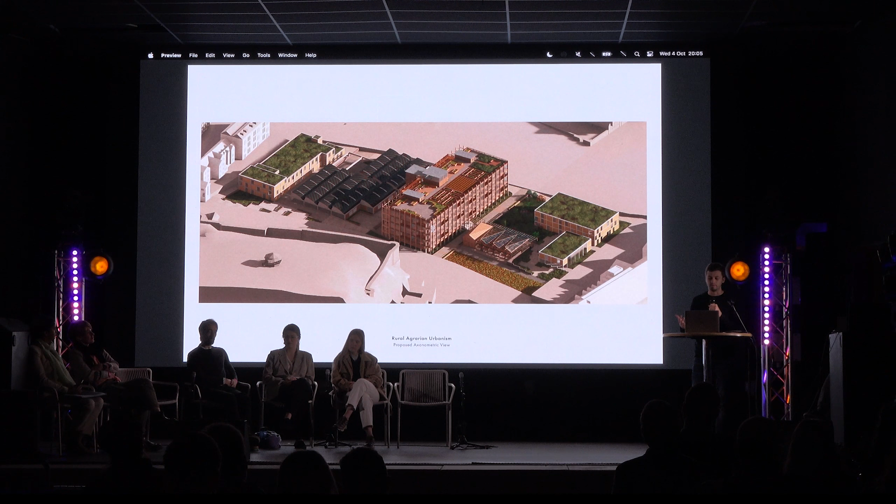Essentially it was the idea of bringing rural principles and the idea of cultivating land into the urban fabric, and using it as a catalyst for driving social engagement between the inhabitants of the housing block. Our entire brief was to create a co-housing community within Nottingham, trying to create a low-rise, high-density and near-zero demolition adaptive retrofit project within the urban fabric.

So our site was the People's College, which is at the foot of Nottingham Castle, so quite an interesting site. Essentially, creating a community which is embedded within the city with an emphasis on visual connections between clusters of residents and the wider general public, layering the physical and visual separation between the two realms.

Making prevalent use of urban growing to not only offer a focal point for engagement through a cohesion between food production and the observation and distribution to the general public. So that's trying to have the cultivation of land as a social engagement between the residents and also the wider general public to keep it embedded within the city itself.

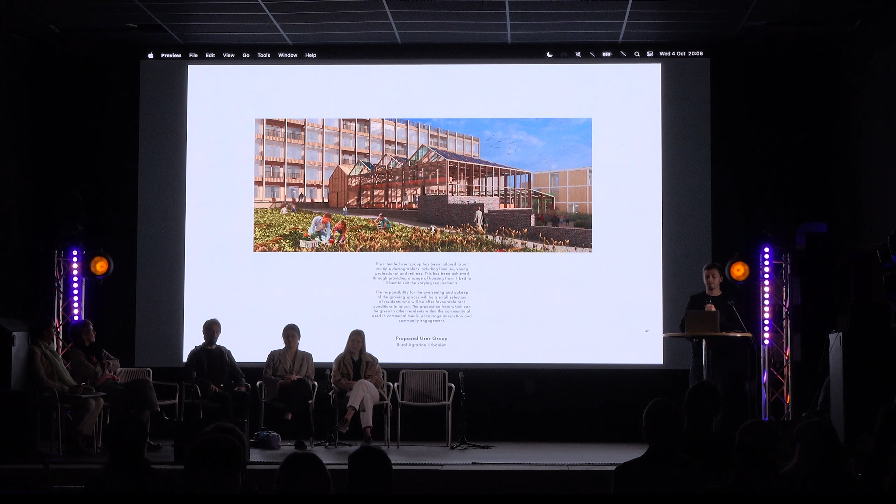So trying to incorporate more user groups. With the apartments that I proposed, I've tried to keep it between 1 and 3 beds to cater for varying needs from young professionals to families as well.

So like I said, this was the People's College at the foot of Nottingham Castle. Just to the southeast of the site is the new Broadmarsh development, which has been proposed at the moment. Trying to feed that into the scheme, creating some sort of public green route through the site or ground floor permeability to try and encourage the general public to engage with the site itself.

And then looking at the houses which border to the north and south, looking at the visual connection between these and the potential overshadowing. Similar to the sustainability things that you want to incorporate into the scheme, rainwater harvesting was one thing that I looked at. And then also looking at maintaining views - these were all the principles that I looked at the start before I started to get into the design process.

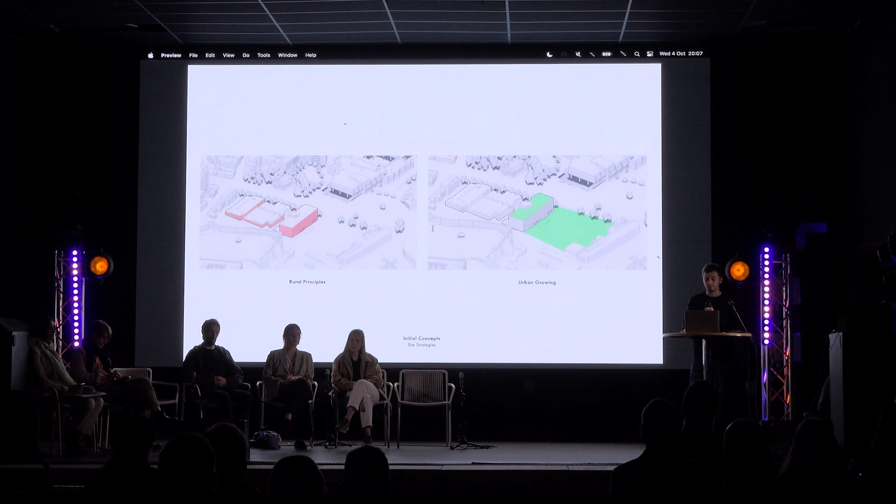Same as I said, rural principles and urban growing. These were just the initial set of principles which I kept as my main briefing when I looked through my scheme: autonomy and self-sufficiency on the site, alternative technologies, a focus on readily available materials, off-grid in regards to water, maximising the utilisation of the existing structure as much as possible, and also maximising sunlight and water access.

So my initial sustainability strategies were looking at retrofitting a double skin facade to the existing 5-storey block, trying to incorporate a passive stack through the centre of that, basically to drive the ventilation and energy through the scheme.

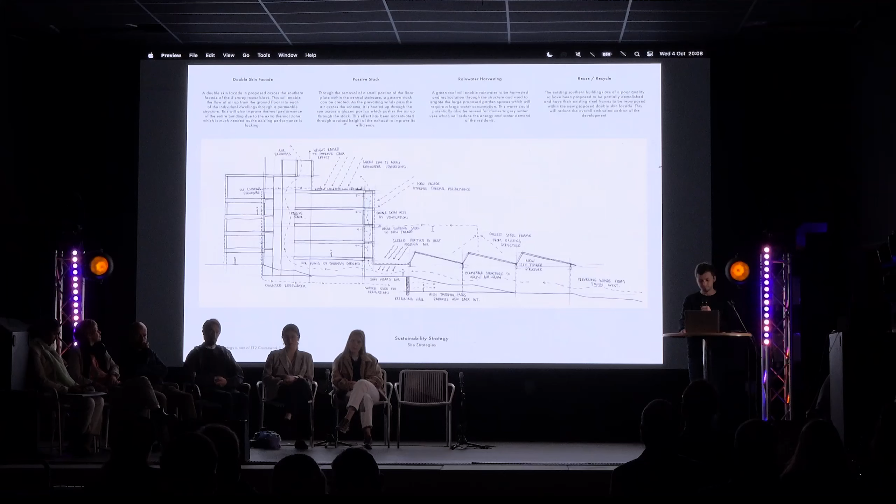Rainwater harvesting, as I said, and trying to reuse as much of the existing structure as possible. Looking at ventilation as well, so any of the apartments that I've incorporated, I've tried to incorporate cross ventilation to mitigate the energy input that's needed for that.

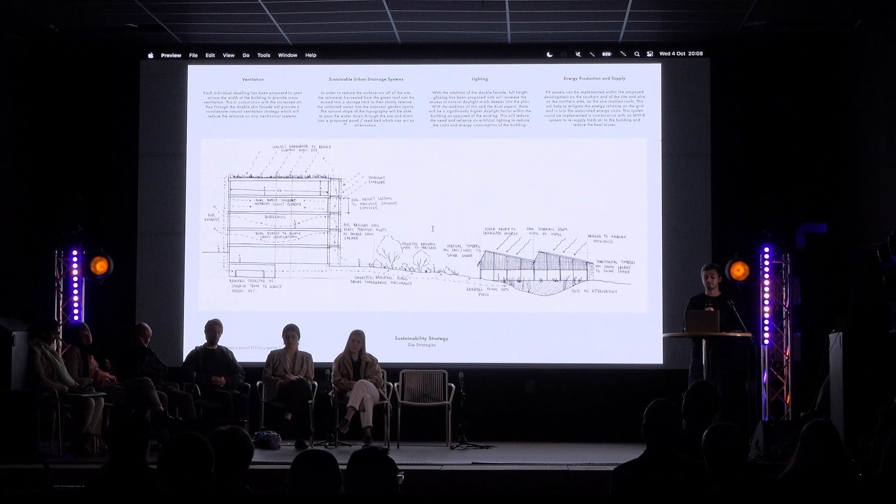Looking at SUDs as well, so the potential of utilising the high elevation fall through the site to drive the rainwater collection.

Lighting as well, so making sure that the height of each of the dwellings is able to access enough daylight to fill the entire area. And then same with the energy production and supply, so trying to incorporate PV panels and trying to reduce the energy consumption of the site itself.

Now what was interesting about our particular brief was we were paired up with an engineer at the university as well, one of the master's students working on the environmental engineering program. So they had a similar sister site which was in Fareham, and we collaborated together to try and create this idea of an off-grid community in Nottingham.

So any of the agricultural waste, urban waste and biomass which was created on my site would then be transported to this sister site, which the engineer would work on, and then anything energy, food production and water offset would then come back into the site to try and keep this cohesion as well.

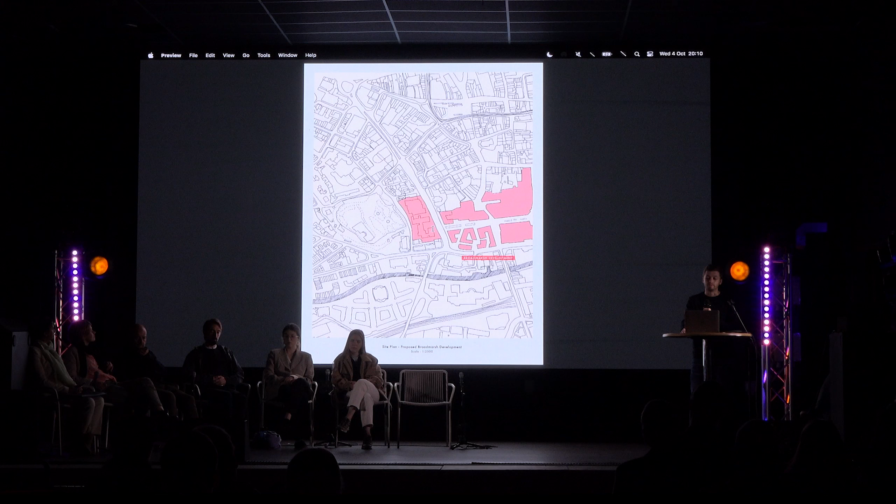So that's the existing site plan, just next to the castle, and that's the proposed Broadmarsh development, which was an important driving force into the scheme itself.

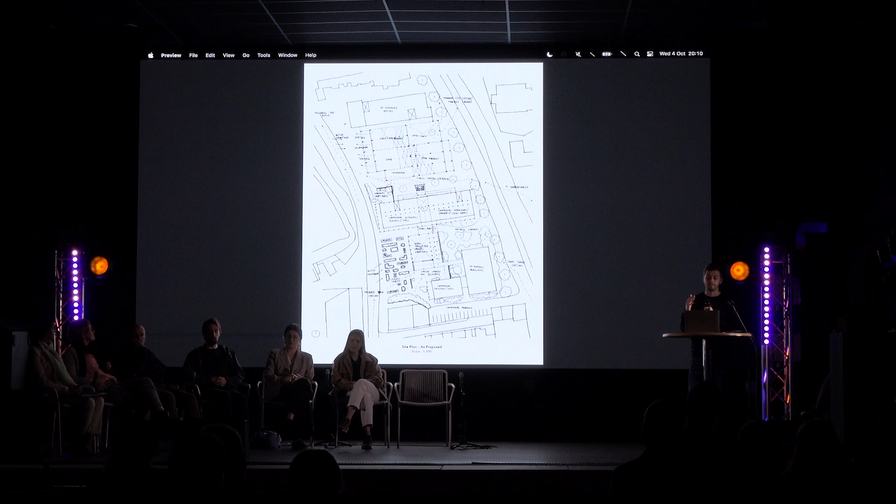My sketch site plan: the idea was that the northern end of the site would be the more public realm, a bit more permeable, feeding into the Broadmarsh space, and towards the south would be the more private residence space with private gardens and co-housing elements.

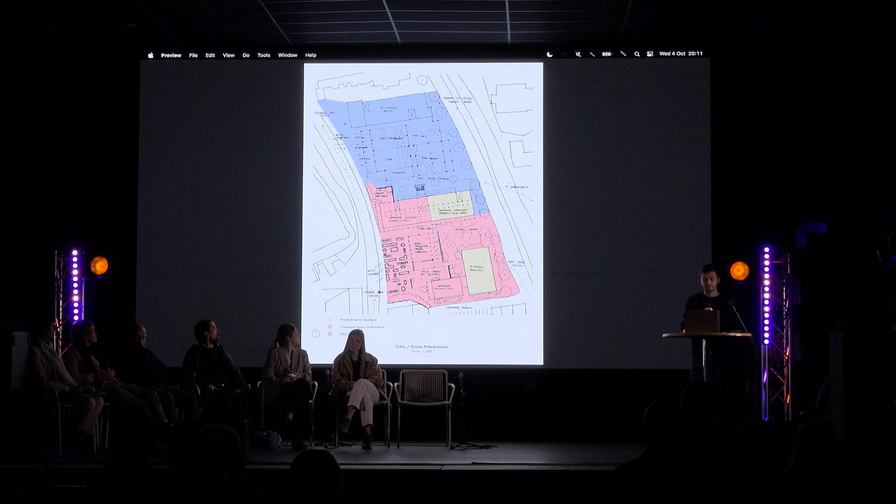That's just graphically shown—towards the south, that red area would be the more private realm, and moving up towards the top would be the more public realm.

This was just the site of the main housing block. Just to the left you can see the large cliff face and wall bordering Nottingham Castle, acting as a second facade, really enforcing on the housing block, which is something I needed to look at.

There's the long street section from the east side, showing the drop of the site, which needed to be quite thoughtfully considered through the scheme. And that's looking towards the city centre from the opposite side.

Again, that's showing the large drop through the site, which was quite a difficult thing I needed to tackle. So I implemented the initial sustainability strategies I talked about earlier into the scheme.

On the northern side, the more public realm, I looked at adding strips of glazing and ribbons of light within the scheme to reduce the need for artificial lighting, trying to engage views into the public realm from private realms, and making sure there's enough light access as much as possible.

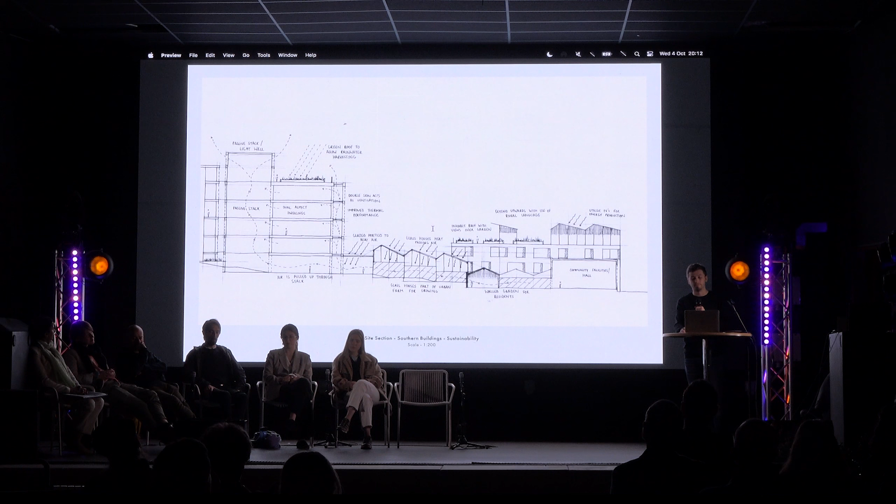On the southern side, on the left, there's the passive stack in the main residential block, which drove the energy strategy for that block. It also acts as a light well to reduce the artificial lighting need as well.

There's rainwater harvesting on the top, and the double skin facade retrofitted to the front of the scheme. Then moving down, going into the glass houses and food production areas, which would also need a lot less energy consumption.

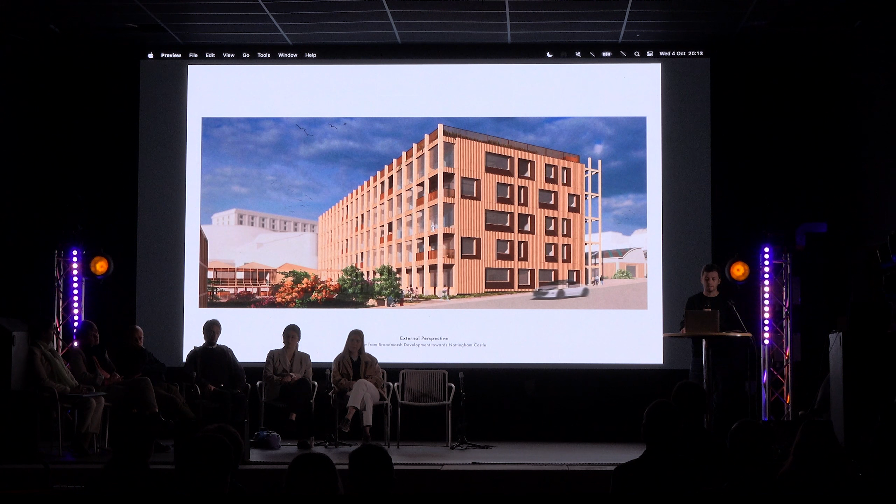So that's the existing scheme and the final proposal. Looking at the external perspective, you can see the external armature which has been added—a glulam post and beam structure retrofitted to the front, and similarly towards the back, acting as the main walkway and access to the properties.

This is the main housing block. Across this armature there are elements of double skin facade, winter gardens and balconies associated with the dwellings on the interior spaces.

This is just a cross-section through that main residential block, showing the passive stack through the central part. As a co-housing block, this has been split up into 4 clusters.

Essentially clusters of 6 or 8, which act as mini communities for social engagement, with elements of communal space for them to engage with each other.

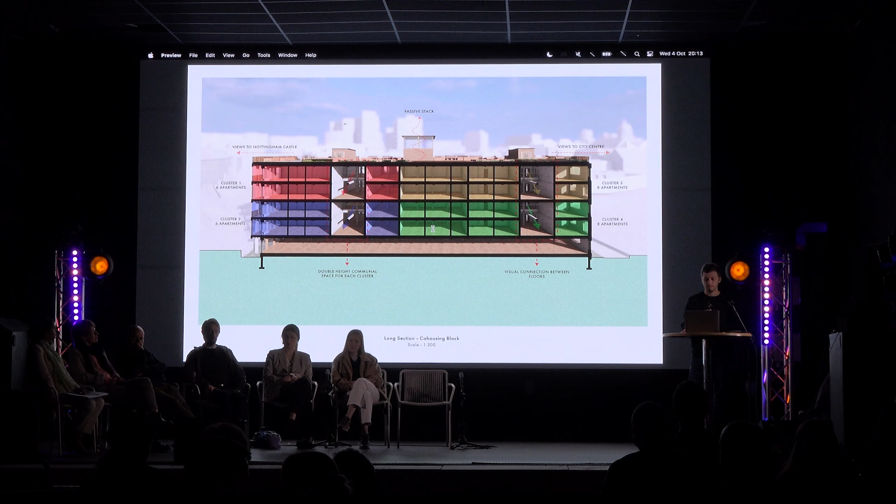Along the ground floor will be the completely communal space that everyone within the housing block will be able to utilise, looking at communal dining spaces and workshop areas where they can engage with each other.

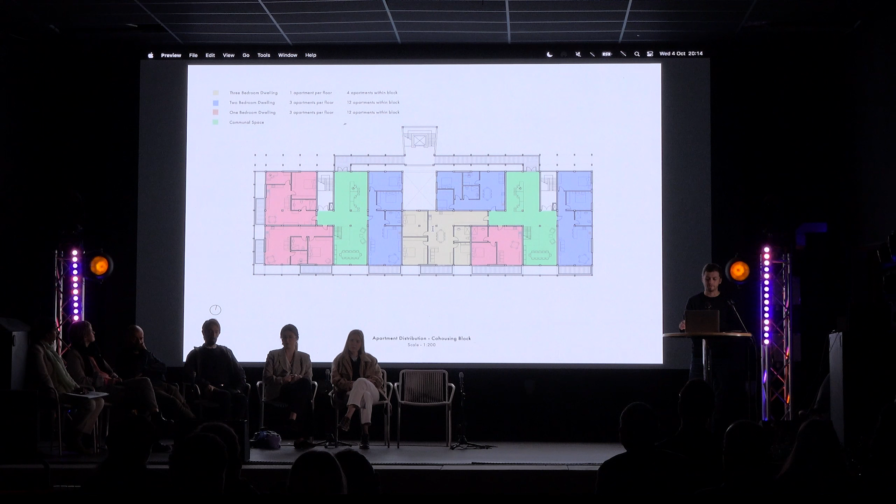In the plans above, the green areas highlighted would be the communal areas where all the residents would be able to engage with each other, and these are double height spaces to try and penetrate light as far as possible into the plan.

The plans themselves have been driven and designed through the idea of making sure each has access to dual aspect and can be cross-ventilated, as well as having access to southern light. They've been made so the most utilised areas are along the south facade—living spaces and kitchen areas towards the south, and bedrooms towards the north.

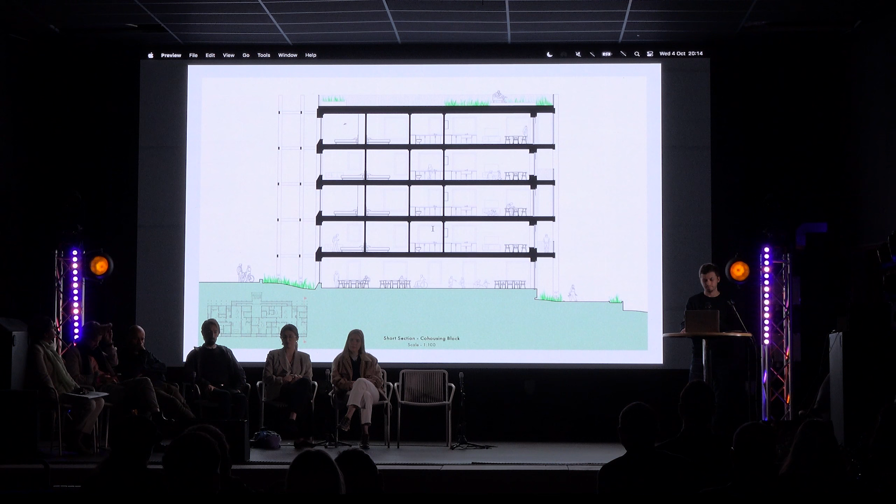Again, similar to what I've just said, those are the communal areas, so they'll be situated within these small clusters of residential apartments.

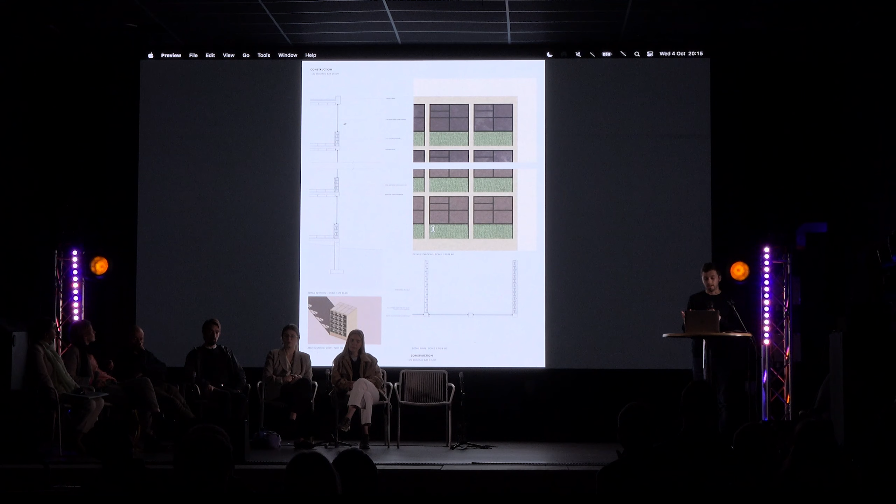For the construction, being a retrofit project, it was important to understand the existing structure, which is just a concrete post and beam structure with infill concrete blocks and concrete green tiling.

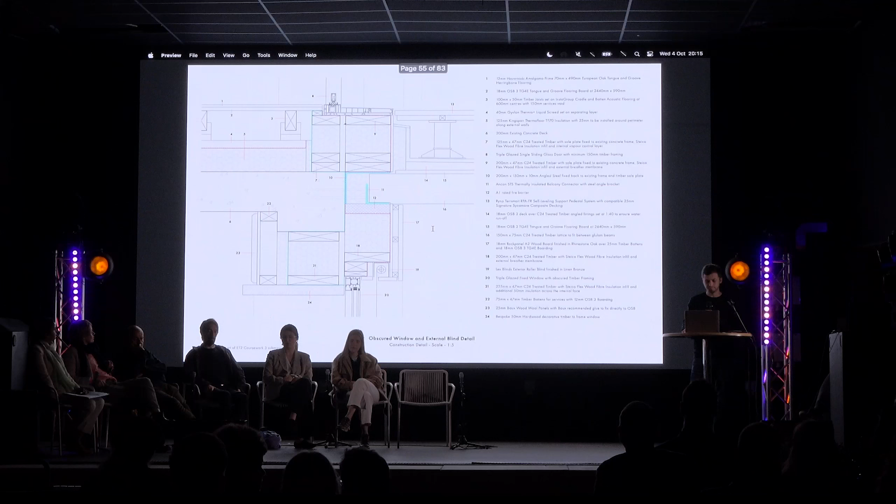Being able to retrofit this, looking at externally insulating the existing structure and adding that external glulam facade and armature, which adds that double skin facade and external spaces to act as an environmental strategy and extra space for the residents as well. That was one of the working details I worked on, externally insulating the existing concrete blockwork.

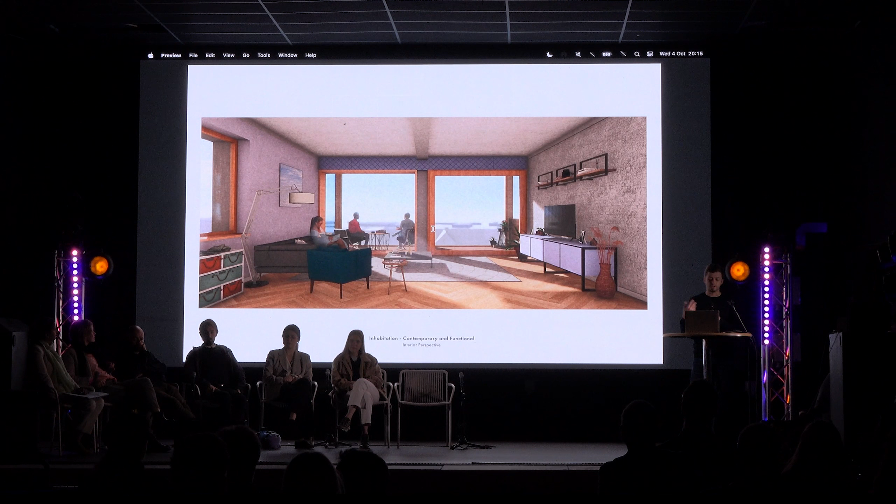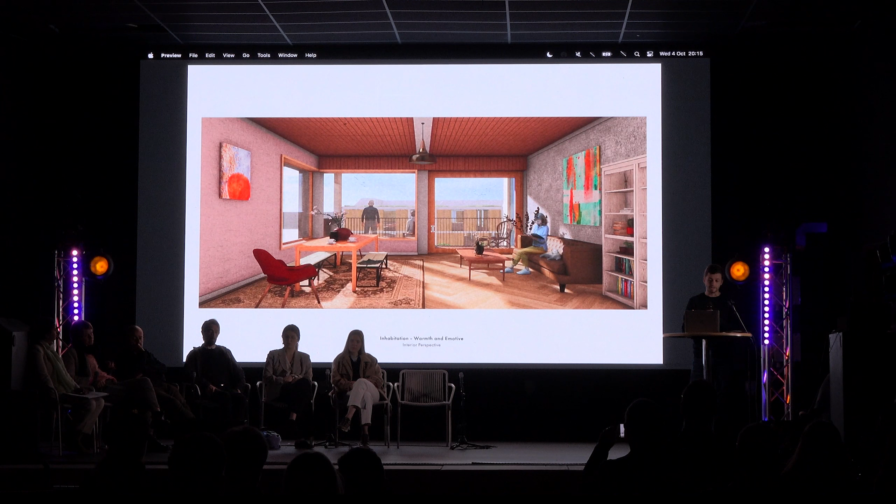One of the precedents I looked at for the external materiality was Jonathan Hendry's Kingsfield Pond, looking at the internal inhabitation of the spaces, how each resident is able to inhabit them and add their sense of individuality, while trying to keep as much of that southern light aspect as possible.

For the roofscape, I looked at trying to keep as much existing as possible, retrofitting with PV infills, using it as a design tool. That was a fine art precedent to look at how to implement this as a design tool.

This was my idea for retrofitting these concrete vaulted roofs with zinc standing seam and PV infill, looking at the interior light quality and how this might create a bit more of an opening atmosphere in these spaces.

This was mirrored on the south side - these were the glass houses, using the existing steel frames and retrofitting with a bespoke timber truss, creating external glazing elements. That's how that would look, creating a bit more cohesion across the site itself.

Finally, urban growing is quite a big driving force in the scheme and driving social change. One of the big precedents I looked at was AgroCité, offering a bottom-up strategy which enhances urban growing itself and the idea of the culture, really trying to create social engagement with residents and the wider public as well.

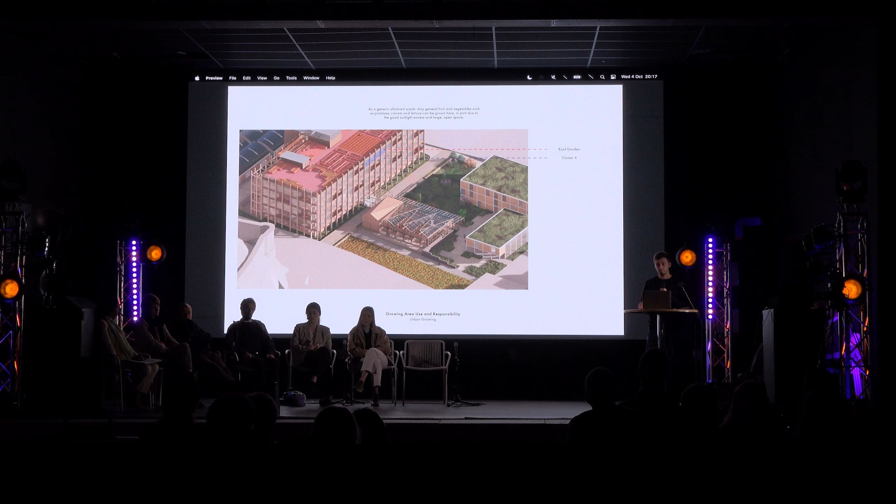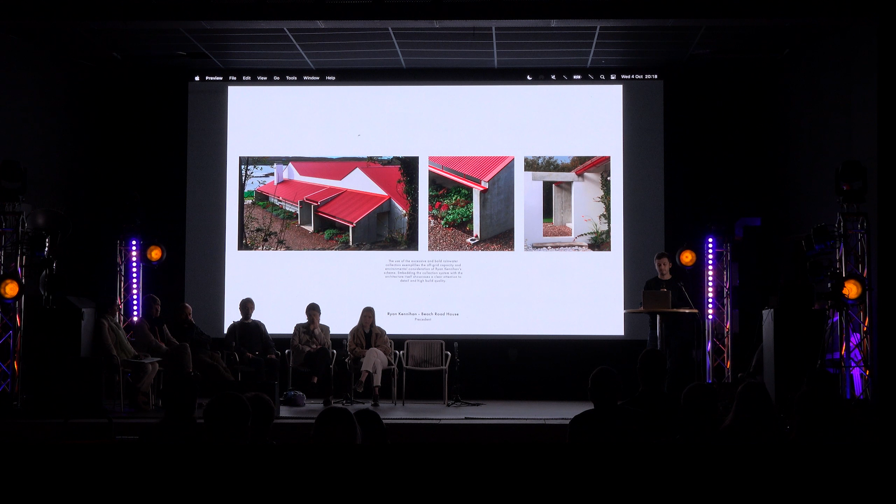Adding to that, trying to emphasize the rainwater harvesting element within this agricultural space, looking at potentially retrofitting external rainwater harvesting methods to make it more prevalent within the scheme.

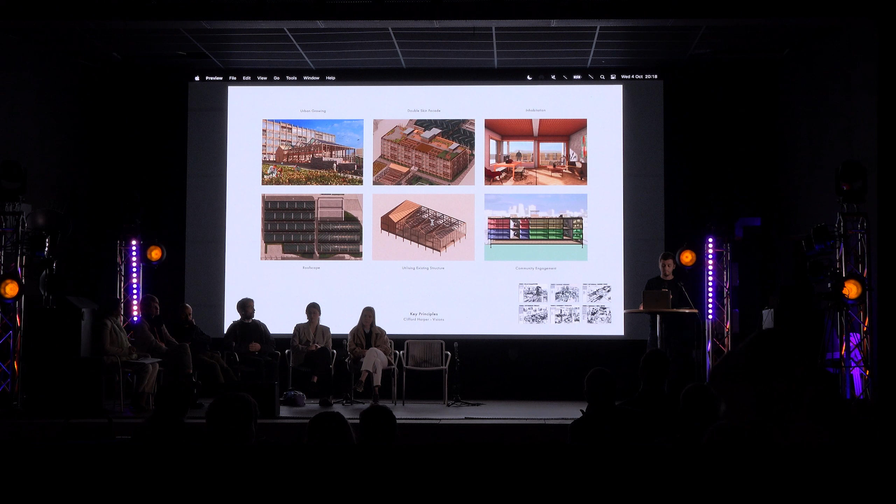And that's the overall project. Going back to that initial Clifford Harper precedent I talked about earlier, picking out the key ideas: urban growing, the double skin facade, the inhabitation of the residents, the cohesion of the roofscape across the scheme, maximising the utilisation of the existing structure, and the community engagement.

That's my project on rural agrarian urbanism. Thank you.

So again, if we start with the panel, any initial comments or questions?

A really excellent project, and so refreshing to see a student refurbishing a building, basically. We're trying to encourage students to do that at NTU. This is actually the scheme we're doing in third year on this particular site, so my question was, would you be willing to come and talk to the third year students?

Well, absolutely, yeah. We might even be able to pay you. Yeah, well, that's a bit of a coincidence. I wasn't expecting that, but it's a really interesting site though. It's a good one to do.

Is this something you see yourself doing in the future, retrofit? I think definitely - I feel like that's the way we've got to do it going forward anyway. Personally I've not been able to work on schemes of this scale, but working with existing structures, I'm definitely passionate about that and feel that's the way we've got to go moving forward. So yeah, absolutely.

Greta? Yes, I really enjoyed seeing the 1970s graphic style that you used and those reference graphics. How did you come across them, and have you reflected on that movement from the 1970s and what might eventually have happened to it, and the future of that kind of movement now?

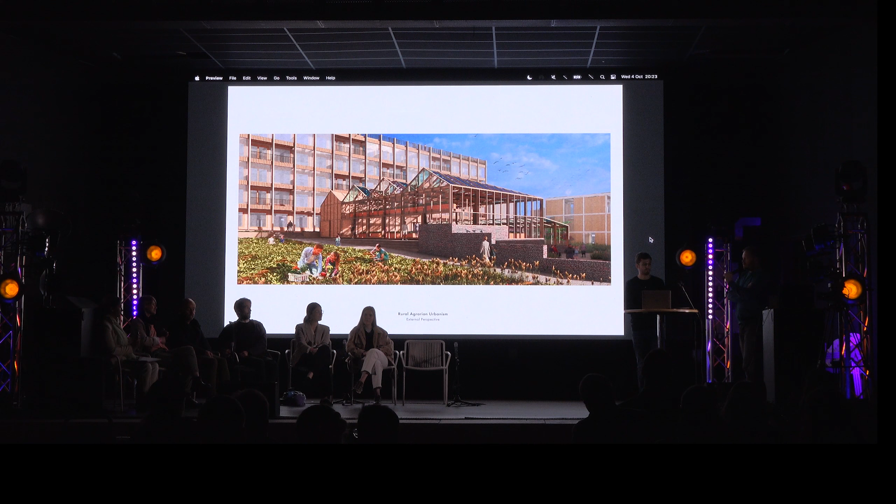Tom, question, comment? Yeah, really enjoyed it. I thought it's a really ambitious proposal with a number of facets. So you're looking at retrofit, you're also looking at land use across two sites and how those connect, which was quite interesting, and then the social community dimension to it.

And the land use material angle is quite interesting, something that Material Cultures talk about in their new book - I don't know if you read that. Yeah, very recently. It's one of the readings on our new project that we've been given, so yes I have. It's really, really interesting.

So with these different dimensions, are you equally interested in all of them, or is there one that's emerged as something you're most keen to explore? I think at the moment I'm quite equally engaged. I feel like it's something I want to explore this year during my thesis, so I'll try to narrow that down and see what really appeals to me going forward. Thank you.